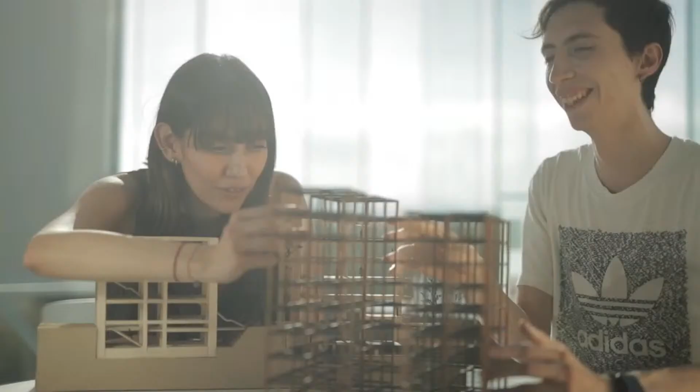Una de las cosas que aprendí en la maestría en vivienda es a no entender la vivienda de la forma tradicional, moderna, que es la compartimentación de los espacios domésticos, sino entenderla a partir de dinámicas familiares, de otros tipos de habitantes, una vivienda entre roomies, como es una vivienda para una abuela y su nieta.

Un cambio que hubo en mí fue como una capacidad de sorprenderme en cosas que normalmente daba por sentadas. Mi nombre es Bettina Rincón y estudié la maestría de vivienda en CENTRO.

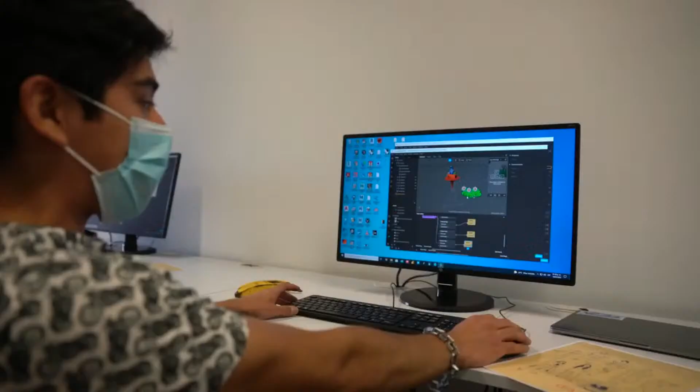Más que arquitectos, van a egresar estudiantes con nuevas formas de hacer arquitectura. Vas a salir sabiendo cómo presentar un proyecto, vas a salir sabiendo cómo diseñar, pero cómo diseñar desde formas inimaginables.

Entender que la belleza es un derecho básico para todos, entender que queremos aquí tocar temas de resiliencia, de sustentabilidad, desde un lugar de lógica, desde un entendimiento de cómo generar abundancia a partir de la escasez.

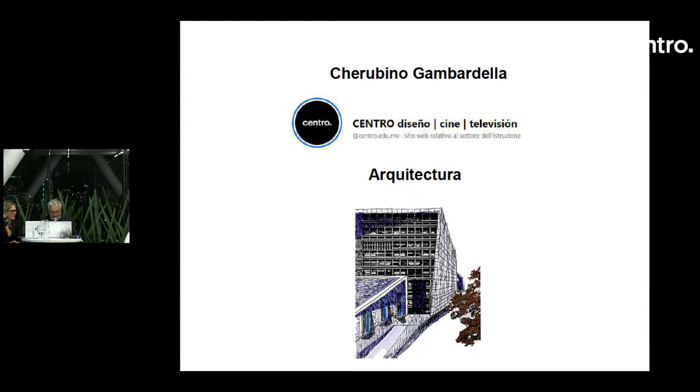Molte grazie. Thank you very much for the opportunity. Thank you to Miquel. Thank you to you that are here so late to listen our conference.

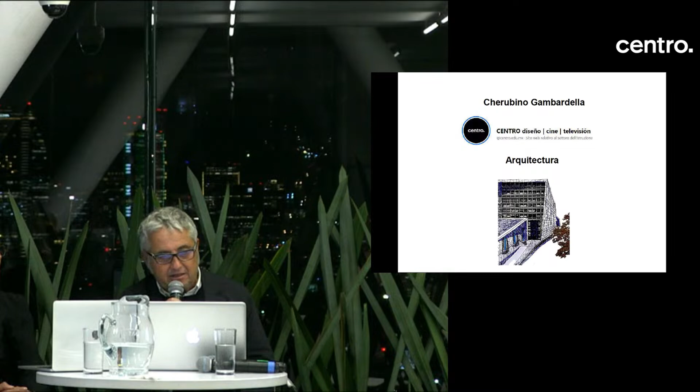I won't begin for half an hour about showing our project, but especially on architecture and on a singular way to do architecture, using pre-existing structures and transforming it without demolition. But this is just a little different from only an additive practice. It is exactly a transformation. We don't add more cube or more surface to the building, but we change completely the sense of the building, transforming its face into another actual face.

In this case, these are some sketches from before the restoration project of the Casa del Fascio, by the very famous Italian architect Giuseppe Terragni. And we were the winners of the competition for the restoration 4 or 5 years ago.

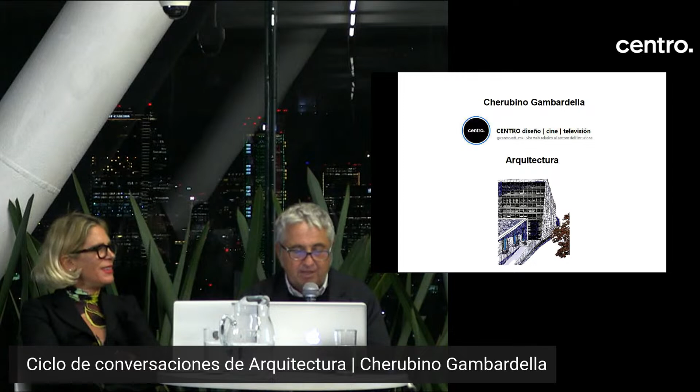In the idea of Terragni, these false windows or these false elements suspended were in rotation. But now it's impossible because the actual laws don't allow us to do something that is rotating, and we imagined transforming it into a sculpture, a fixed sculpture, so you can use these elements like a natural machine with the shadow and with the climate. And so it's something that gives the building a mystery that it had lost.

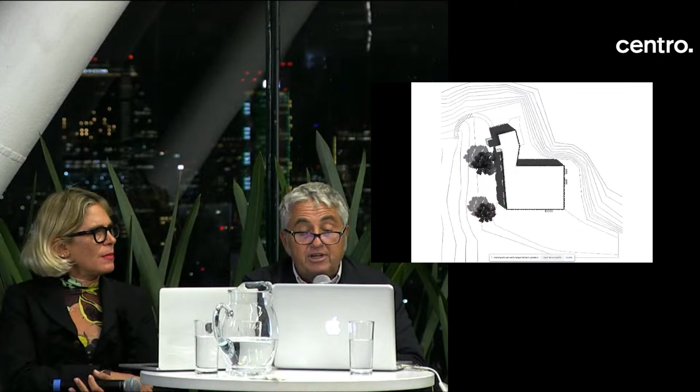Traditional, or very strange, like in this case. Before, the house was a normal house and was totally full of humidity, because the walls are not deep enough to maintain the heat or the cold. So the first thing I thought is I have to transform the walls into something bigger. This is completely isolated on four sides, so the wind is very strong. So during winter this house is very cold, and during summer it's very hot.

So I decided to add these orange pluvial tubes, and I put concrete inside. And with concrete and with this polyurethane foam, you can increase...

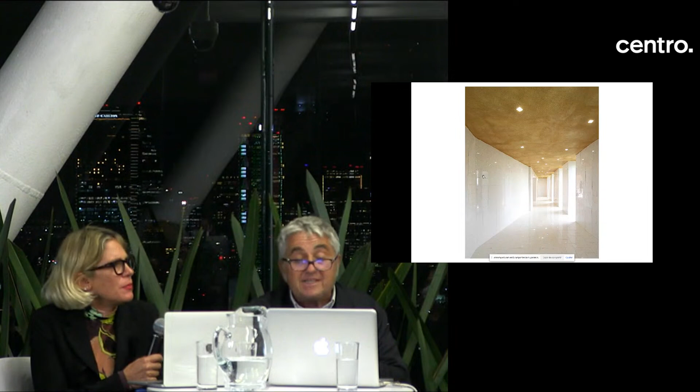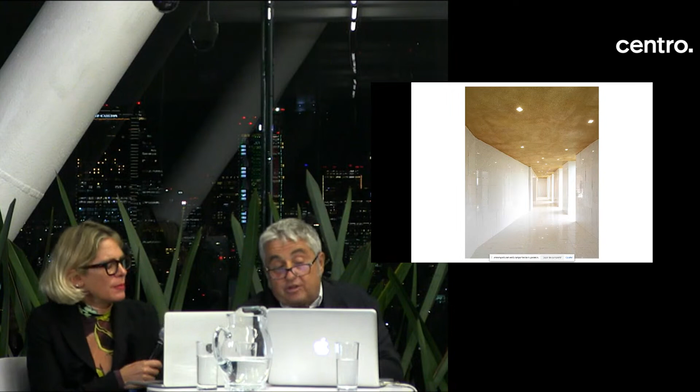This was the limit of the existing structure. I changed and reinforced it, adding this new part toward the kitchen to connect the space. I used white tiles for all the space, so I don't have a lot of problems with humidity.

This is Golden Building, my first work, one of my first works, 25 years ago. But it's a very famous building because it was published many times.

When I arrived at this place, my clients said, you can do all you want, but you can't demolish this. And this was like an illumination for me. I understood that it was possible - before I never thought to not demolish.

This was a very strange work for me. I changed the skeleton, the shape of this building.

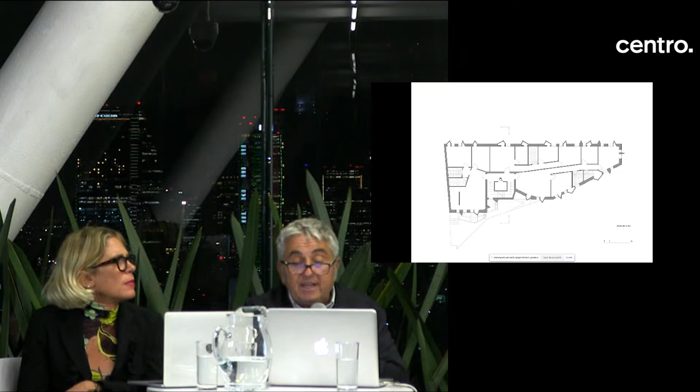Using this plan, I used these elements like storage, suspended storage elements. And I divided the building into 3 apartments, 3 flats per floor.

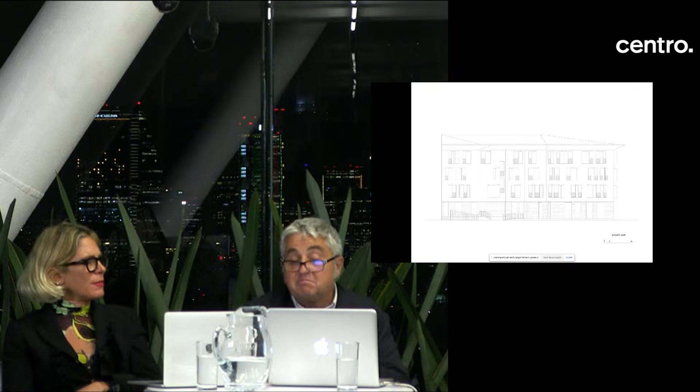This was probably inspired by Gardella, an architect, probably Sostres, Moragas - many architects that were very important for my formation.

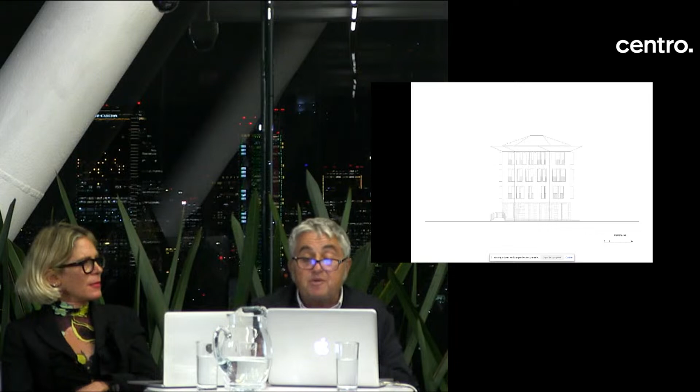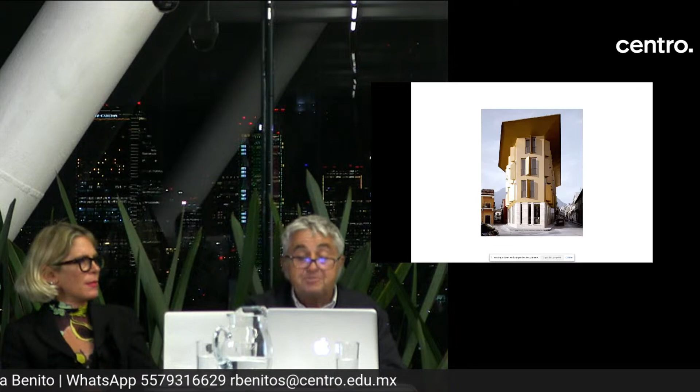And this is a big hat. So I transformed the cornice into a big hat of 4 meters. You have this that is 4 meters, covering the street. So this is the building finished.

You have this image. We tried golden painting for 5 months with sequence testing before using it, because I had to be sure - they guarantee it for 10 years - so the painting doesn't become green, because the problem was that this painting could turn green.

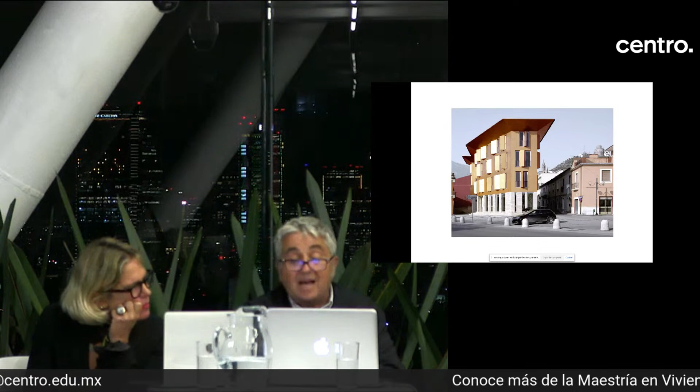This is at the beginning of the historical center of this old city in Campania. You can see the Rocca with an ancient Roman tomb and other historical elements. And this is the shape of the building.

After, I won a competition, and they gave me the work to transform the square. I imagined a serpentine in inox with these elements that maintain the green, so the green, when it goes up, closes the space completely.

White Bunker is the first of my skeleton villas. This is a skeleton villa in Sperlonga, near the sea in Italy, in a very beautiful place. This was the terrible concrete skeleton that I found.

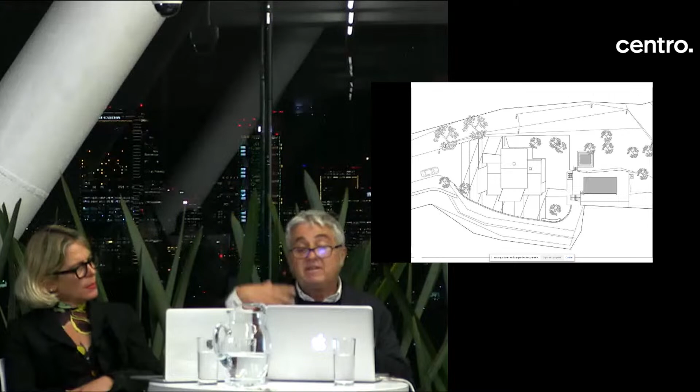My clients said, I want to have a lot of things that you can add to the building. So I said yes, I'll try. And I tried to add all these things, and I transformed the building into this, using also in this case Knauf wall to have good thermal inertia. This is a white crackle finish - it's completely finished in white crackle.

The second one is immediately under the first. The same client asked me to transform this too - it was in 2014. He said, in this case I want you to do some Palladian villa, I want a lot of columns. So I imagined something similar and used plastic orange columns, but in this case I painted them white.

So there is the green, and after, a secondary structure to have shadow. I maintained the building, but it was very difficult to follow the skeleton, because I think it's very important to follow the skeleton without transforming this occasion into something that is architecture for an art gallery. I think it's important to do real architecture that you can use as a normal house, even though there's an old skeleton that maintains the structure.

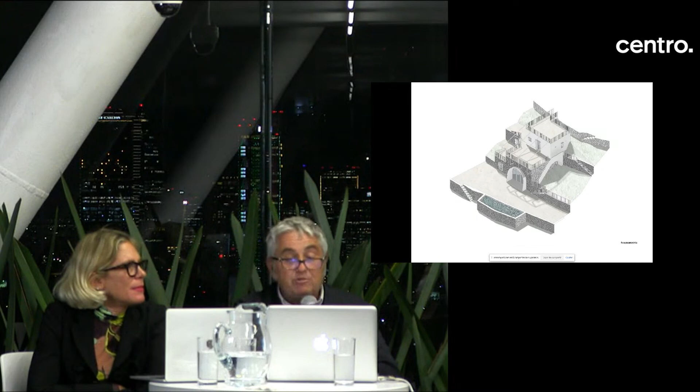This is our last project, under construction. This is a vacation house in Positano for some friends, and these drawings are inspired by Bernard Rudofsky's work.

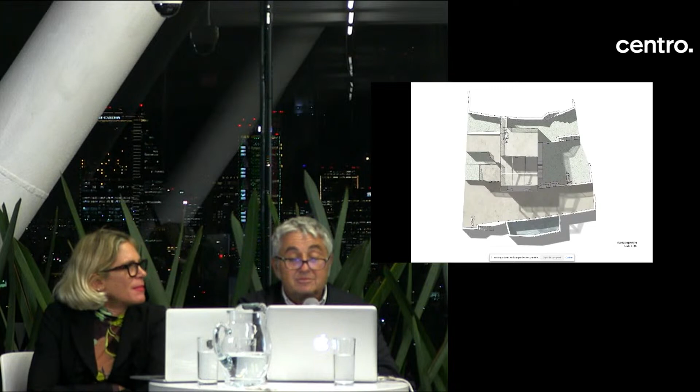This is the actual situation. And this is the fantastic site - you have the 5 islands of Galli, Capri, Positano. It's a very beautiful place. Cluster Bio-Mediterraneo.

And I'll end with this work - another competition that I won.

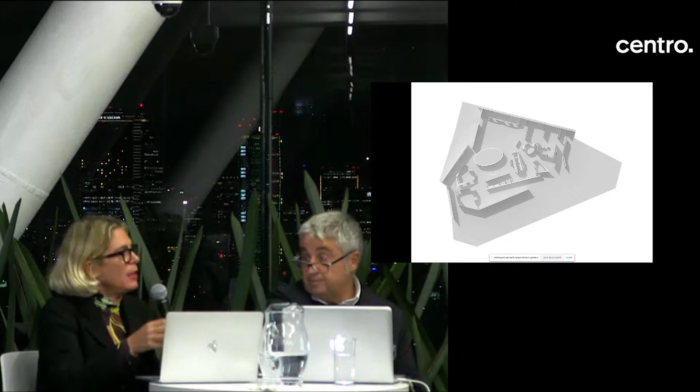There weren't objects, there were only ideas.

This is the table of design, and underneath there are many objects from a private collection linked to the kitchen. These are reproductions of very famous chef plates of Italian cuisine, and in front of you the plates that in Italian are named 'del buon ricordo' - which I think is easy to understand. Buon ricordo.

This is the kitchen of the future, famous for Siemens, which manufactures these very technological appliances.

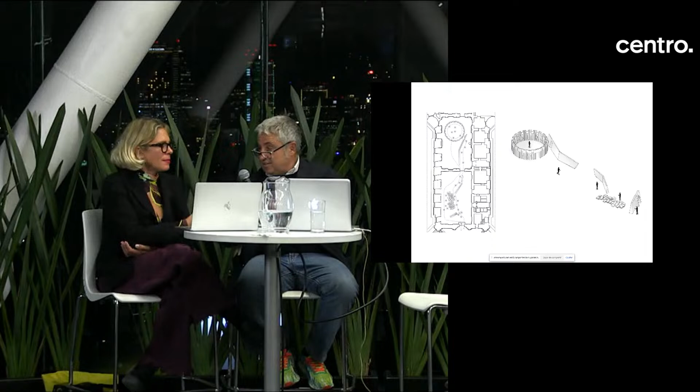A collection, this is the timeline, a collection of buildings within another building. This is a theme that we like very much to work on. And now, Divina Sezione, the same place, an exhibition for the anniversary of Dante.

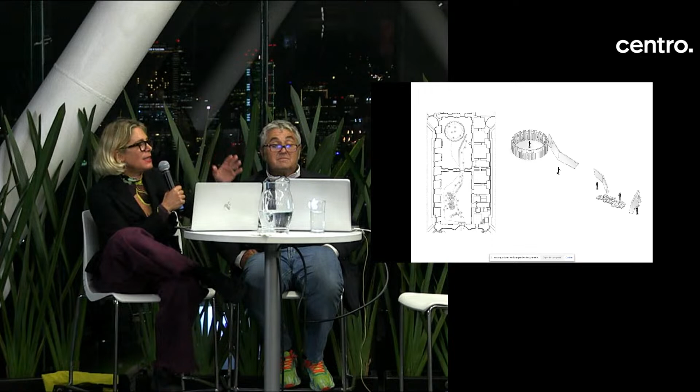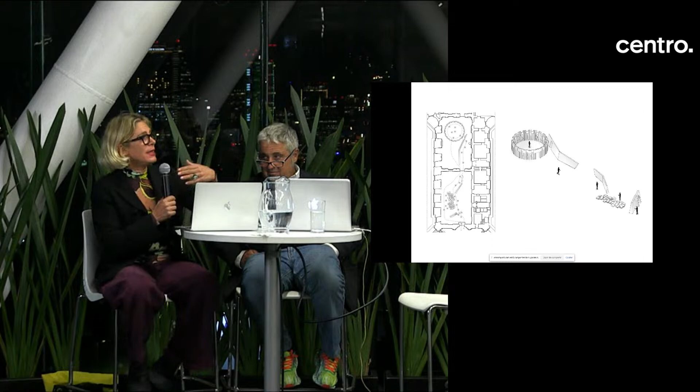So I decided to divide the exhibition into 3 parts. The first one was on the ground floor, and you have to look down to see the objects. The second part was made by walls.

This is the entrance, because through the entrance, the big door, you go inside the extra world. Yes, ultraterreno, mondo ultraterreno.

This is the inferno, the representation of the inferno, so you have to look down to see the works. The only exception is the little tower, which is Michele De Lucchi's piece.

Then these walls are the purgatorio, so you have to look in front of you. And the final part is the Paradiso, where you have to look up to see the works.

And this work was made in cartongesso - it was the sponsor Knauf, and the structural part in aluminium was expressed like a decoration.